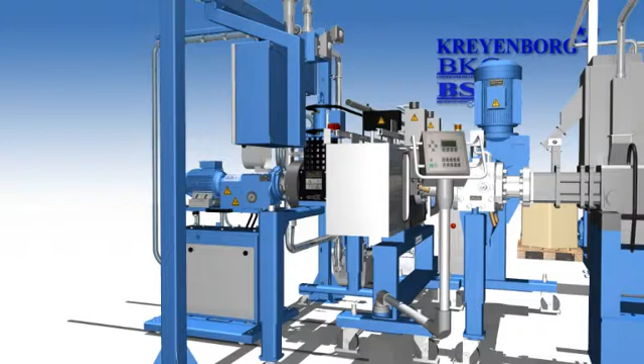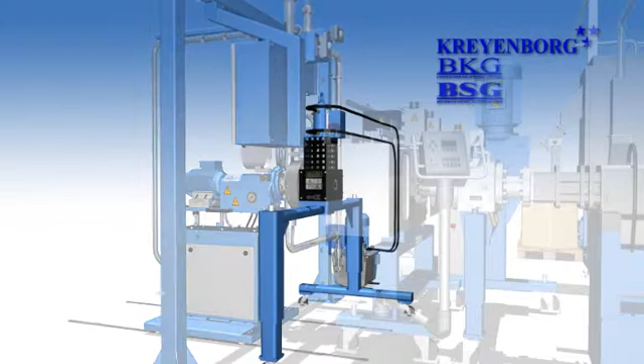BKG Bruckmann and Kreyenborg Granuliertechnik GmbH is widely acknowledged as being one of the leading manufacturers of underwater pelletizing systems. These systems are suitable for processing almost all types of polymer melts, and the potential applications for pelletizing are wide-ranging. An underwater pelletizing system consists of a pelletizer assembly and a diverter valve.

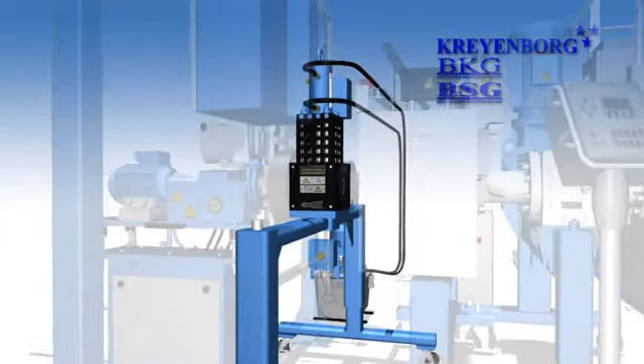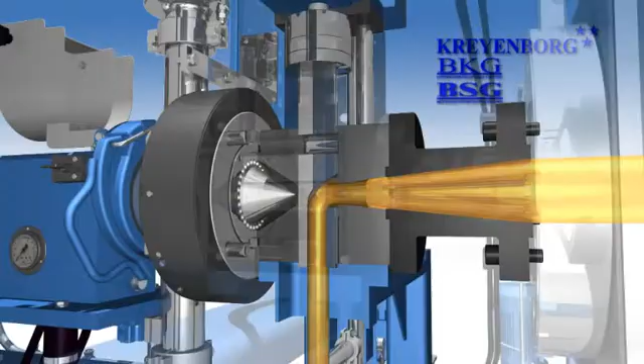During startup, the function of the diverter valve is to direct the flow of the polymer melt into the pelletizer at exactly the right moment. Prior to startup of the line, it is in the divert or dumping position. In this position, the melt flow is directed towards the floor out of an opening in the bottom of the valve body and may be collected in a container. This allows the extruder and other upstream equipment to continue running even when there is an interruption to the pelletizing process.

Before starting the underwater pelletizing process, the granulator is disconnected from the cutting chamber. The die plate is then purged in order to remove dirt and residual material.

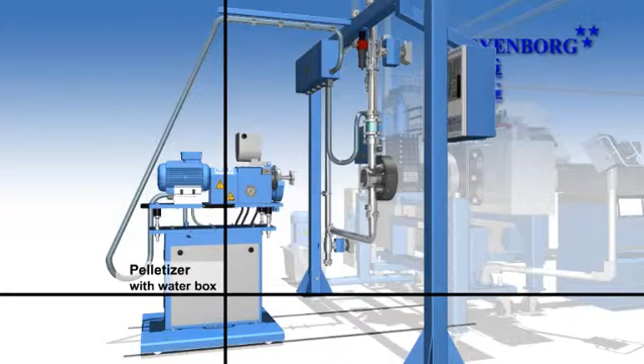In order to achieve this, the diverter valve is switched into the production position so that the melt flows across the cone-shaped displacement plate through the holes in the die plate and enters the cutting chamber water box as individual strands.

After flushing the die plate, the diverter valve goes back into the divert position and the cutting chamber can be cleaned. The pelletizer is now ready for production.

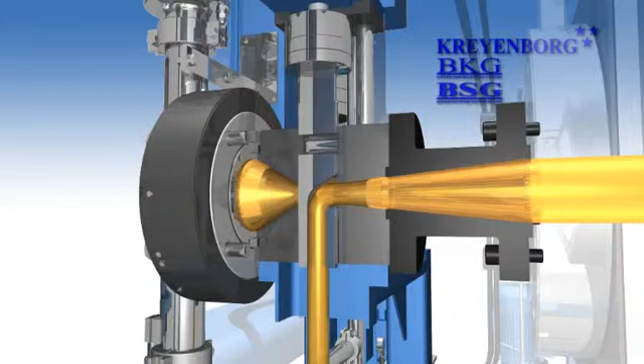The next step is for the pelletizer to be coupled to the cutting chamber, so that the cutter hub is adjacent to the surface of the die plate.

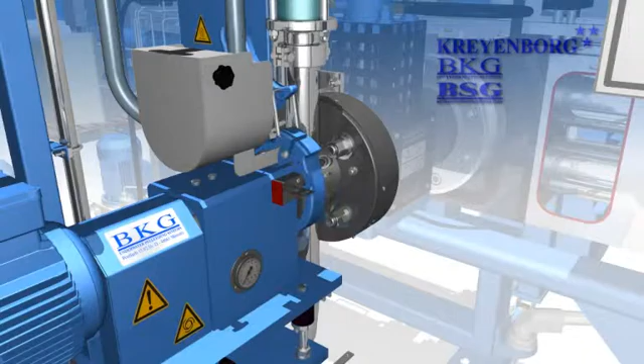Now the startup sequence begins. The details of this procedure may vary according to the type of product. The function of the individual pelletizer components is precisely coordinated by BKG according to the individual requirements of the melt being processed. At this point, the pelletizer cutter starts to rotate.

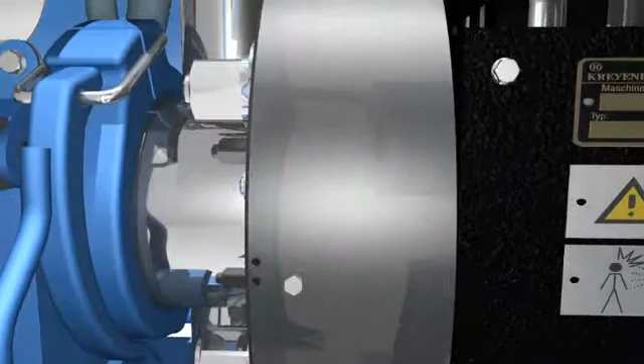Prior to startup, the process water is flowing through a bypass pipe system which enables the correct water temperature to be maintained. At startup, a signal actuates the bypass valves and the process water begins to flow through the cutting chamber water box. Now the diverter valve is switched to the production position and allows the melt to flow through the die plate.

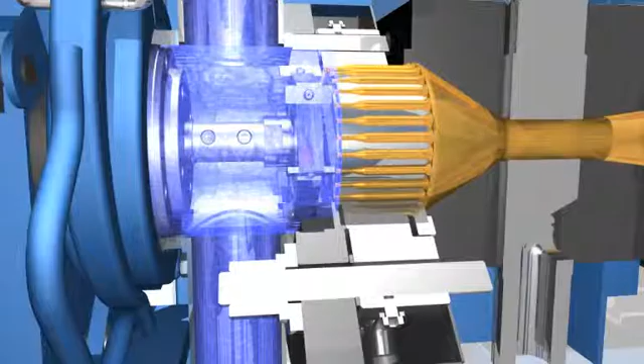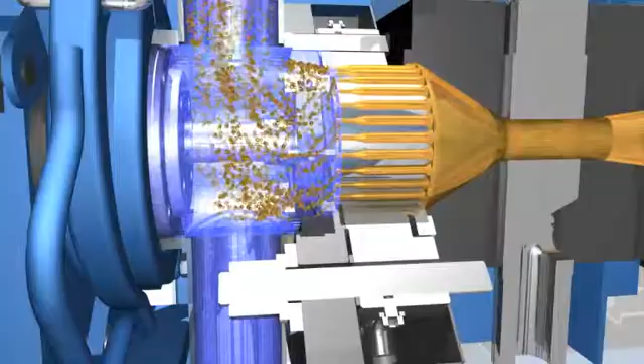The individual strands of material flowing out of the die plate are cut by the rotating cutter head. Due to the temperature differential between the melt material and the process water, the pieces of cut material solidify immediately in the cooler process water and thereby form the smallest possible surface area. Thus, the pellets assume the characteristic spherical shape of material which has been pelletized using the underwater process.

The pellets are conveyed by the stream of process water through the pipe system to the centrifugal drying equipment, which is also a product of BKG.